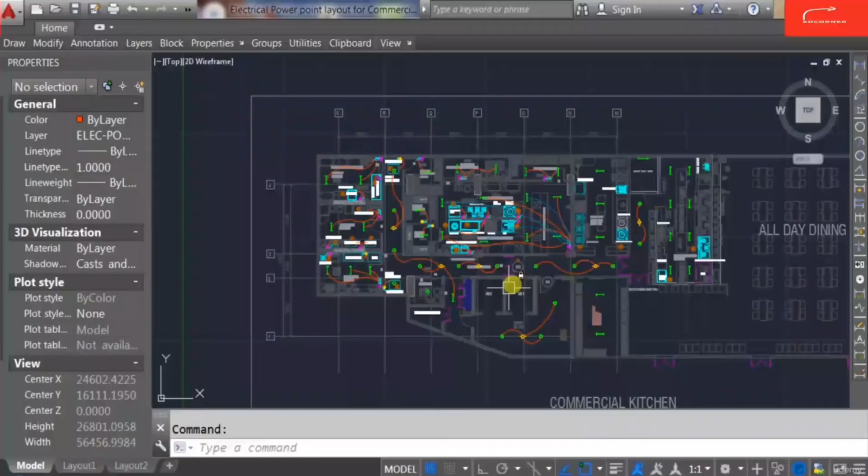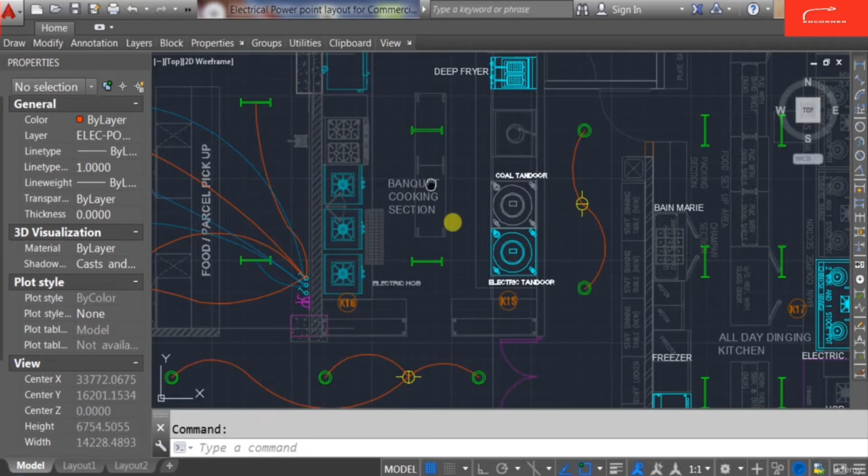So as we have completed this side kitchen area, let us start with this banquet cooking section. In this banquet cooking section, these are some electric equipment: electric hob, electric tandoor, and refrigerator. Deep fryer doesn't require any electricity, and the coal tandoor doesn't require any electricity either.

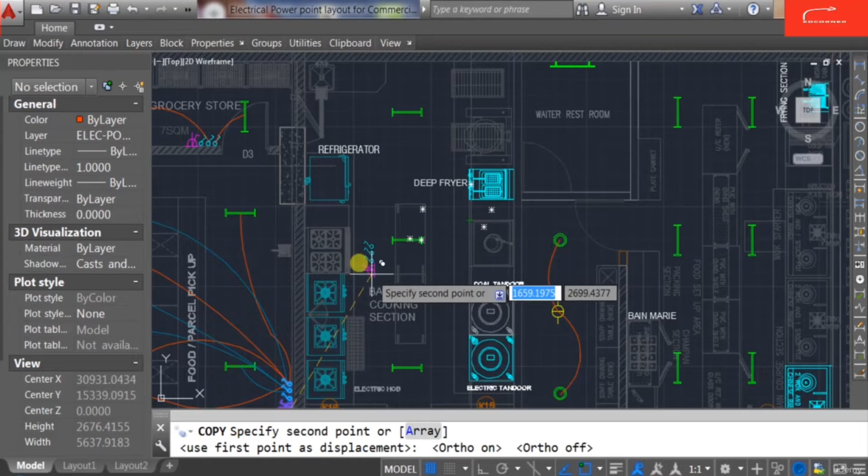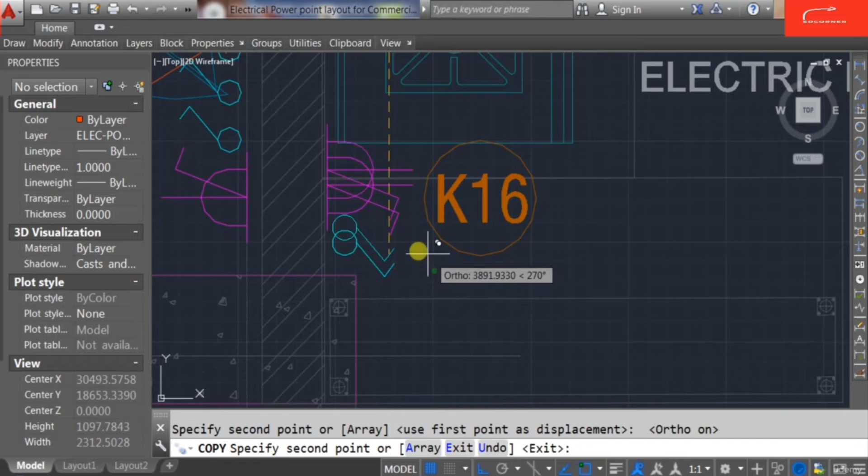So in this area we need to give power supply for this equipment. I'll copy this 3-pin with sockets and give it to the proper location like this. This refrigerator requires one switch and one 3-pin socket. This electric hob requires one switch and one socket. This electric tandoor requires one switch and socket, like this.

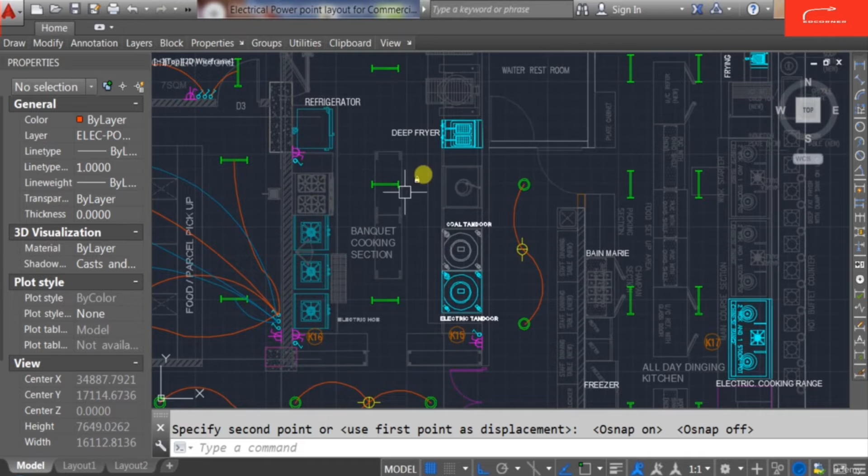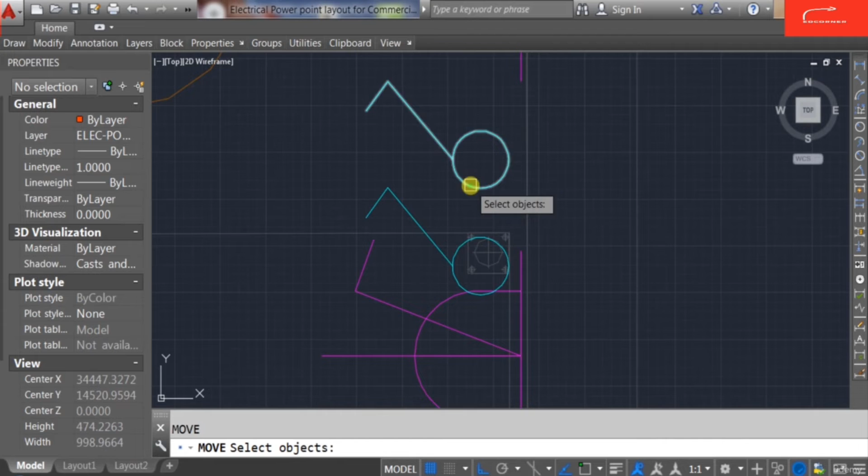Now I have copied over here refrigerator, electric hob, and electric tandoor. One more thing, in this banquet cooking section, these are the LED lighting. For this LED lighting, we require switch and socket. At the entry point, we need to give switch and socket like this. One switch and socket for this electric tandoor. Another switch and socket, one socket will be there, and two switches will be there, one for lighting.

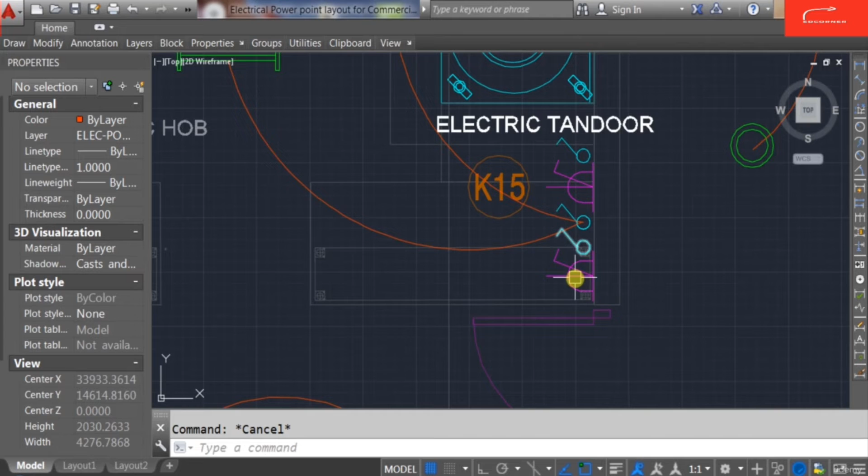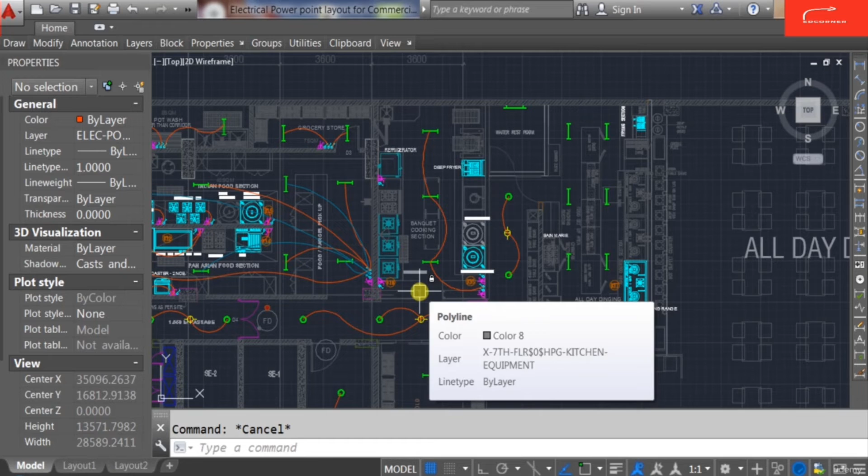Like this, this is the cable, and this is another cable for the same switch. This switch is for 3-pin. So I have just mentioned over here, or we can connect it like this, from here and from here to here. It means I have connected these 3 lighting with a single switch, and another single switch is for electric tandoor, one switch for this 3-pin socket. So I have completed this banquet cooking section area.

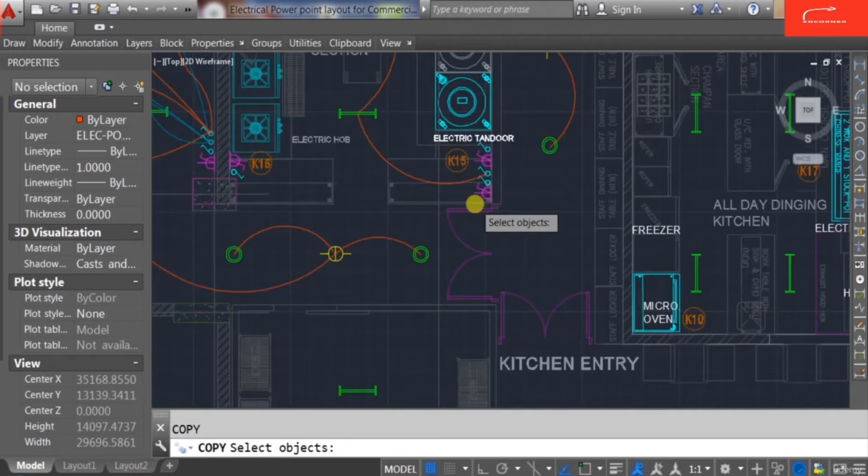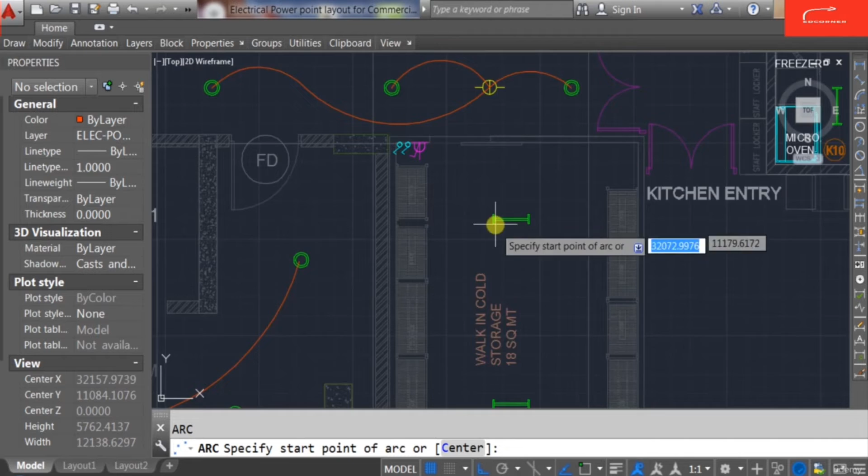Same walk-in cold storage is here. Into this walk-in cold storage, we require a 3-pin as well as the socket and switch. It will be like this. Keep this. There will be 2 switches and 1 socket like this, and this socket is required for this entire walk-in cold storage.

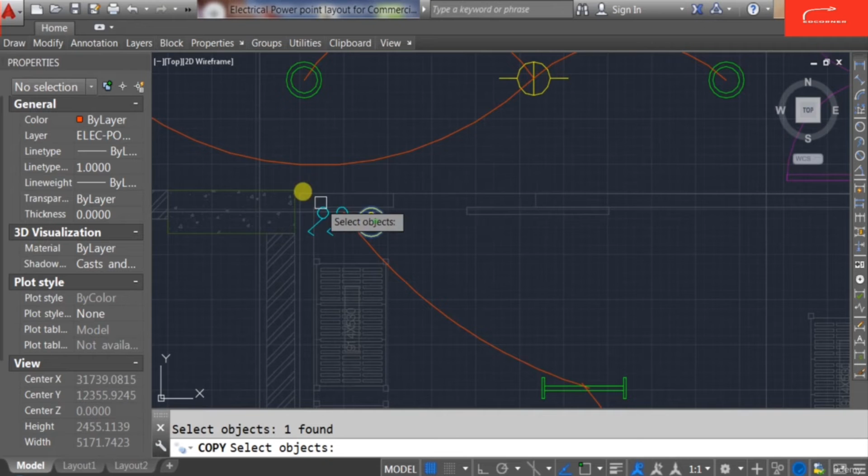Instead of 3-pin socket, we can use the industrial socket for this cold storage area. Here also we require one switch and socket spare for the spare purpose. So we have completed this banquet section area.

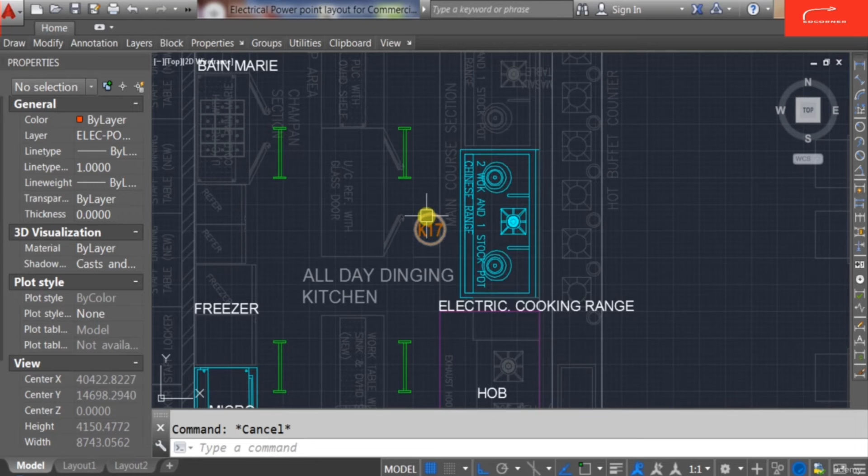Now come to the all-day dining kitchen. The all-day dining kitchen has multiple equipment, but the main electric equipment is the microwave oven, then this electric cooking range, as well as this hob. This hob is electric hob.

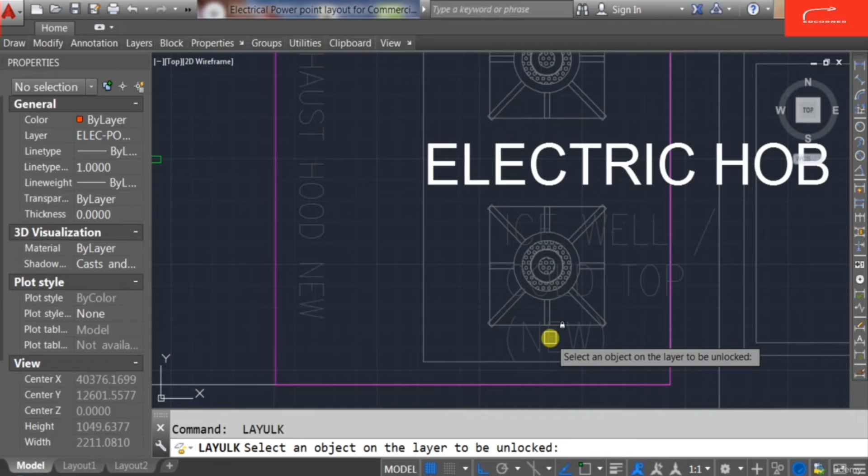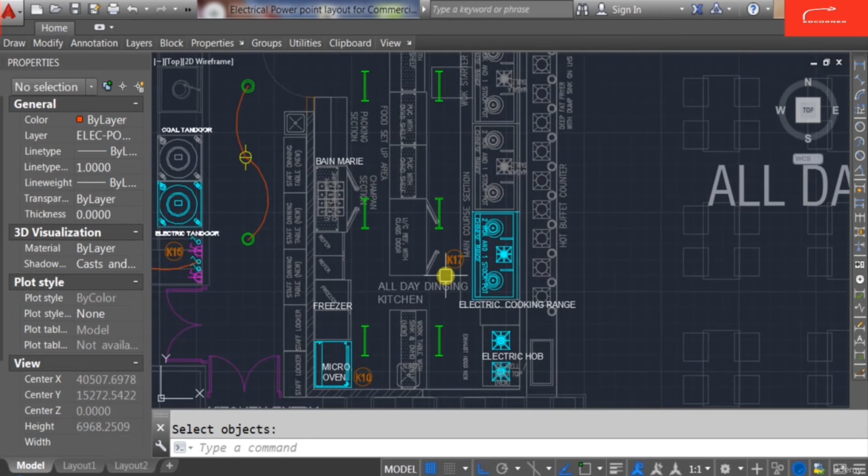So we need to highlight this, layer ISO, layer unlock. So this is what I have just unlocked, and convert this into the layer. To convert this into the layer, we require to select this and highlight this by cyan color, as this is the electric hob. So what we required is, again we require to lock this layer, layer LCK, that is lock the layer, lock the text, and now this is 17, maximum 17 is here.

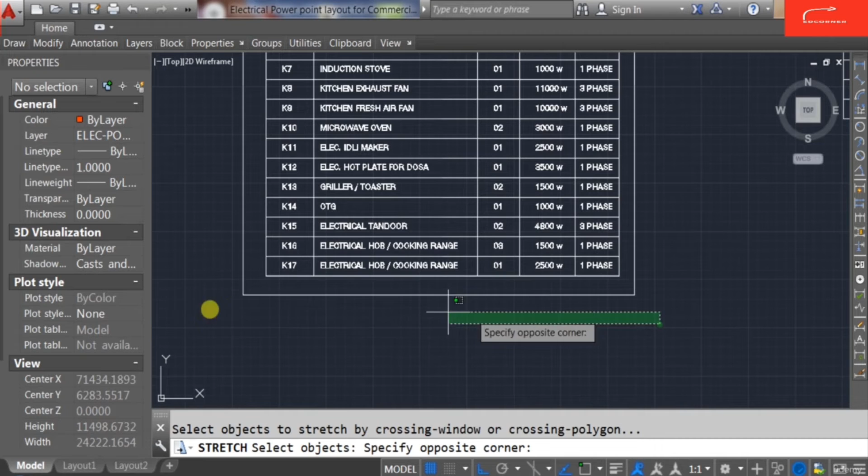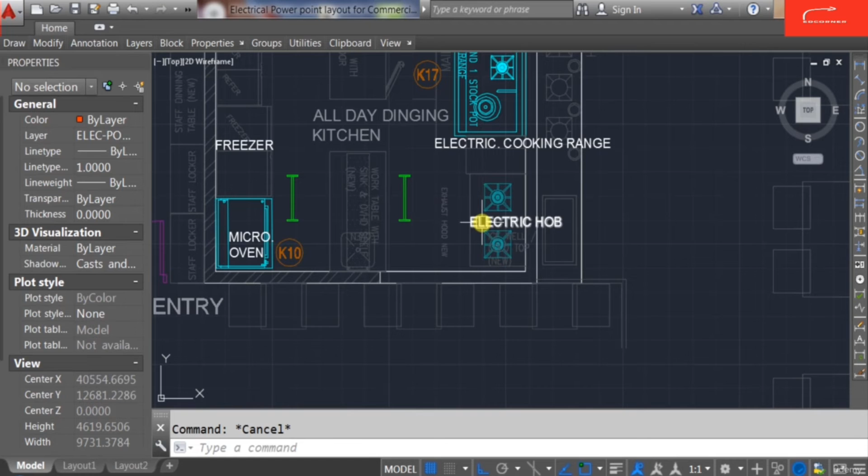Let us unlock the layer and add one more electric hob like this. It's an electric hob, and the maximum capacity is 2500 watts for the single phase. Now make the layer unlock and convert this layer into electric kitchen equipment like this. And then lock the layer.

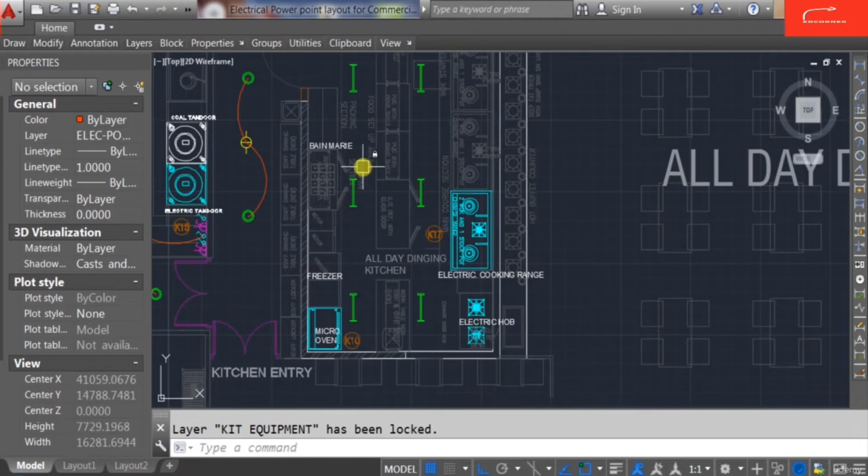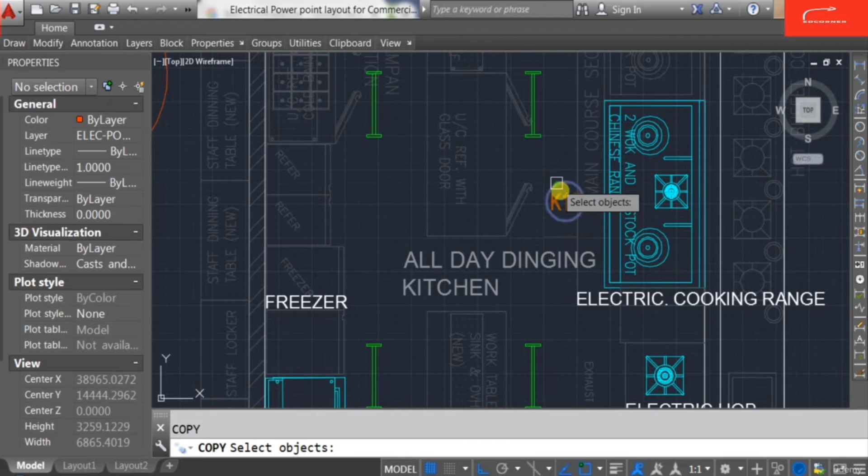Now here I can see, so this is a microwave oven K10, then K10 is what? Here it is, microwave oven. K11, 12 are here up to K17. So last is K17. I will give over here K18, that is electric hob.

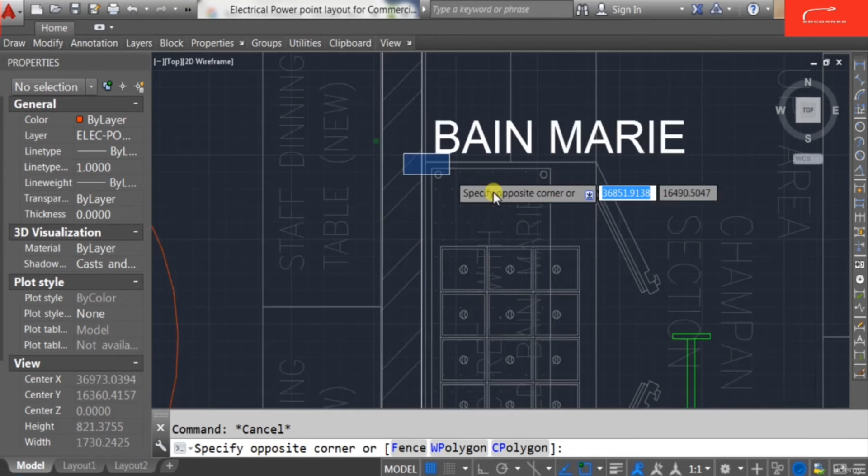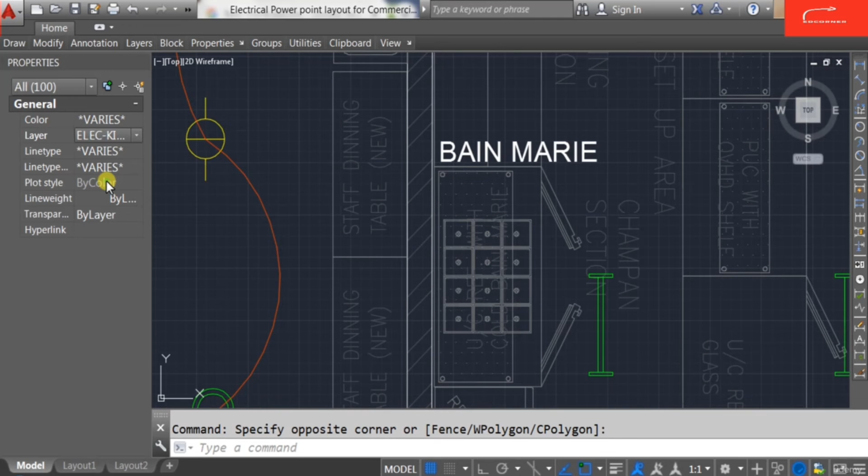Again I need to highlight this one. So I need to make unlock this one and need to highlight this bain-marie. Bain-marie is the electric equipment used in the kitchen to prepare the hot food. So convert this into the kitchen layer, electric layer, electric kitchen equipment, and give it to the ByLayer.

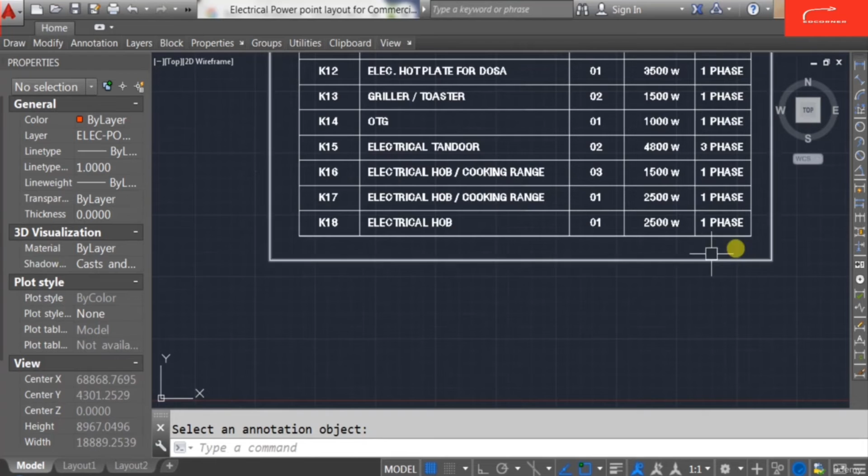So this bain-marie becomes the electric equipment, and I want to give the K18... want to give the tag number, that is K19. So here K19 is the bain-marie, one number. The capacity for the bain-marie required is 3000 watts, single phase.

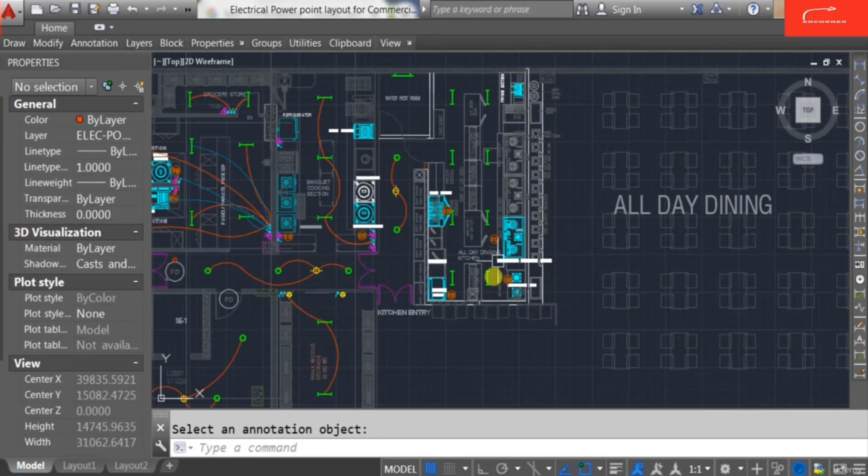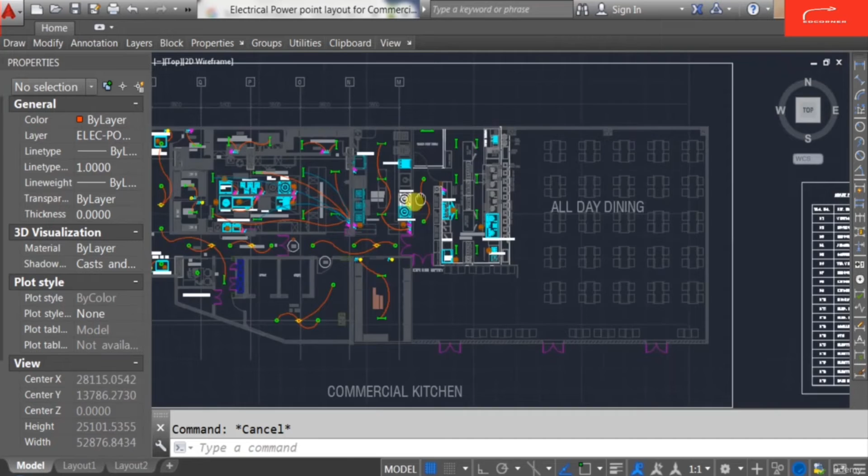These are the kitchen equipments into the all-day dining area. So at the entry point, here is the entry. So I will give the switch and socket like this. Make the group like this, main kitchen LED. These are the 8 numbers of LED, 1, 2, 3, 4, 5, 6, 7, 8.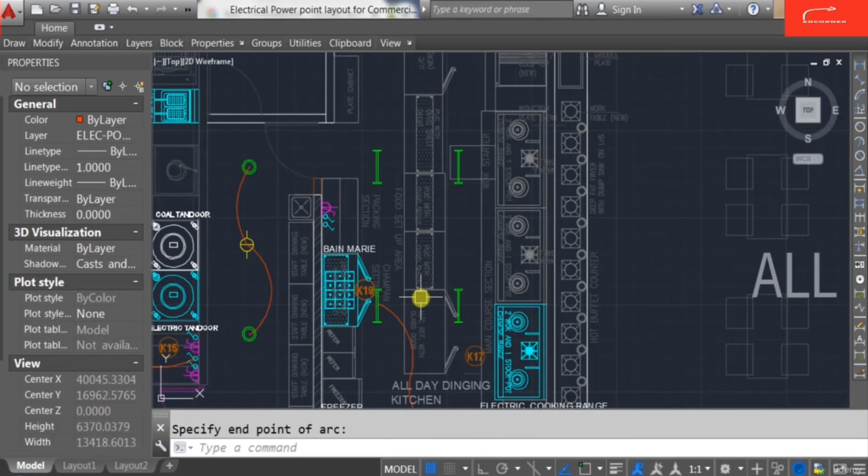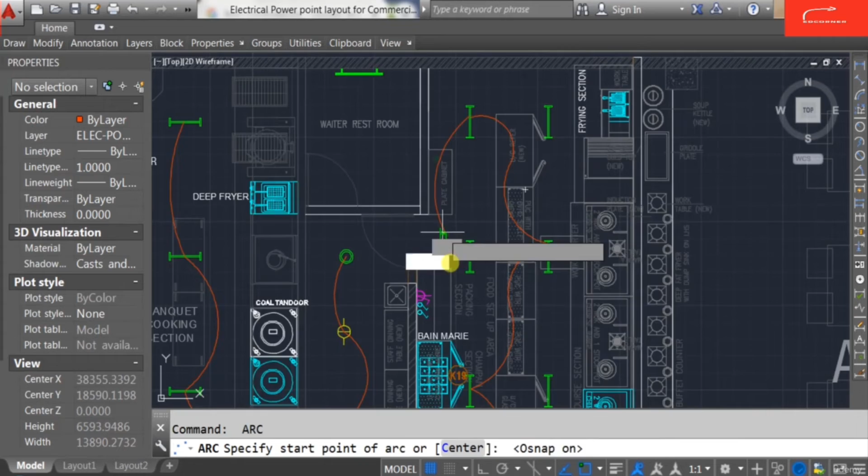So I'll make the group and convert this into the switches. So here it is, 1, like this. Okay, now I will prepare like this. Again need to prepare like this. So one loop has been completed for one button. And another one is like this.

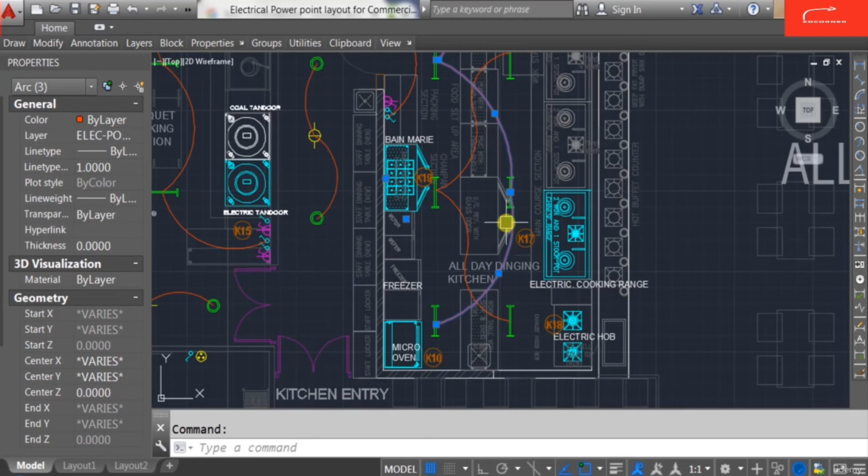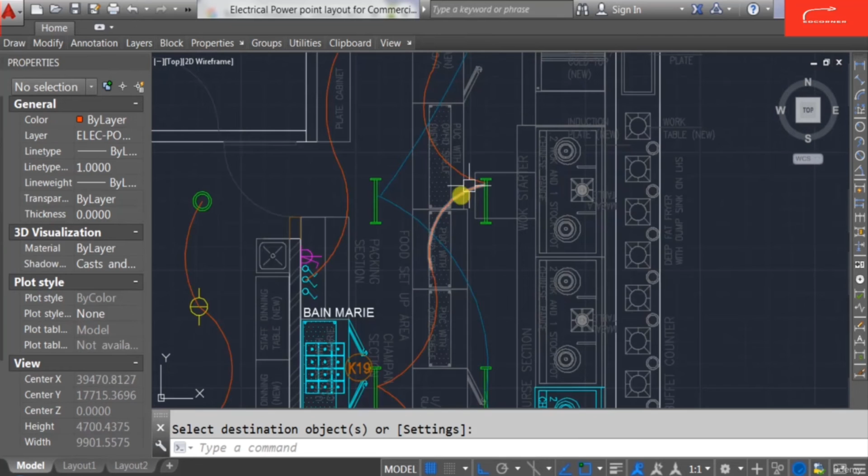Change the color of this cable. So we have just connected this and we need to change the color of this. Match the color this side like this. So I have just completed the LED lighting wiring in this stage, and the next is micro oven.

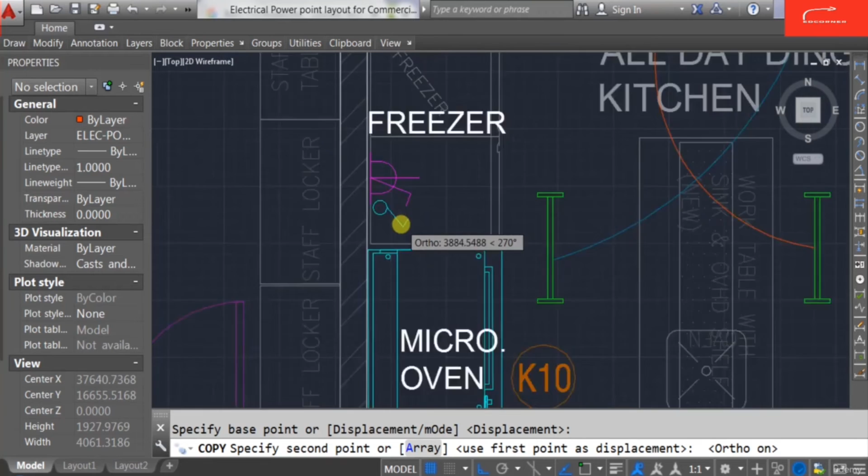So for this microwave oven we require one switch and one socket over here. Then for this electric hob, one switch and one socket requires. For this electric cooking range, one switch and one socket requires.

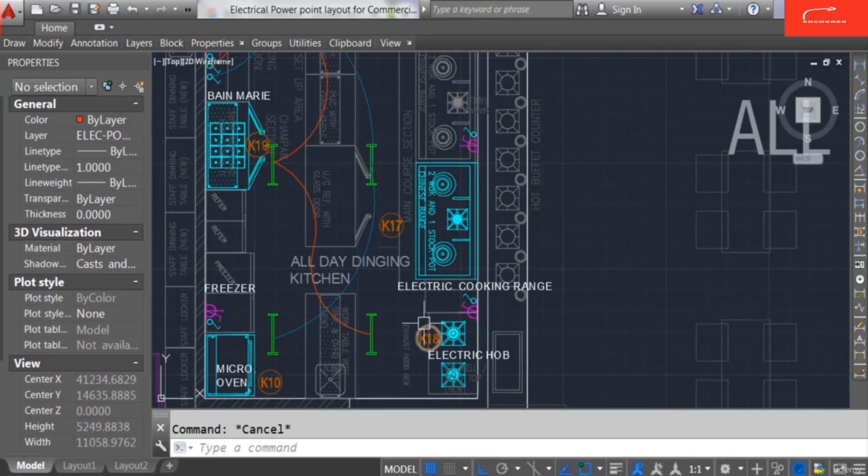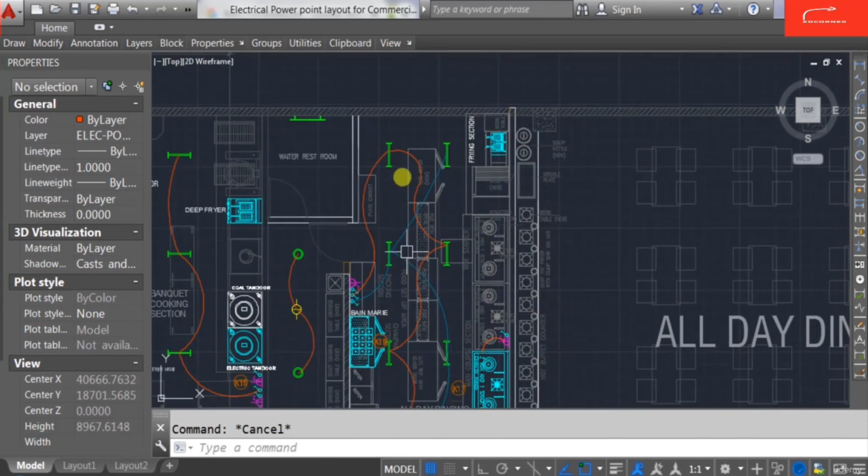So here I can connect like this directly into the socket. Again, this one will come into the socket. From the microwave oven, this will be directly come to the socket. So these are the wiring connections, power cable connections with the socket as well as the electric equipment. So we have just completed this power cable connection with the switch and socket of electrical equipment.